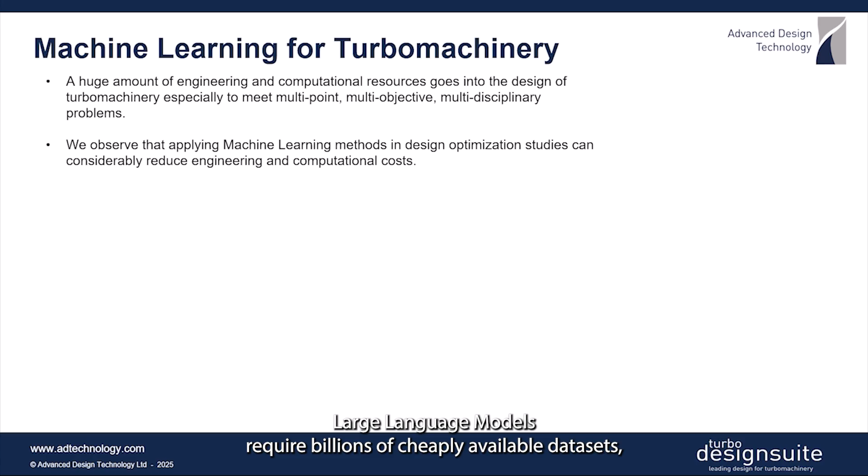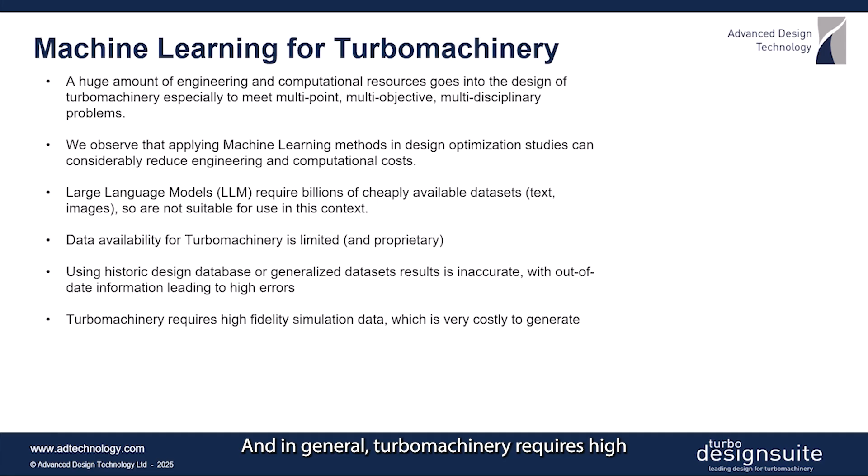Large language models require billions of cheaply available datasets, like text and images, so are not suitable for use in this context. Data availability for turbomachinery is very limited and mainly proprietary. Using legacy datasets is inaccurate, with out-of-date information or poor resolution leading to errors. And, in general, turbomachinery requires high-fidelity simulation data, which is very costly to generate.

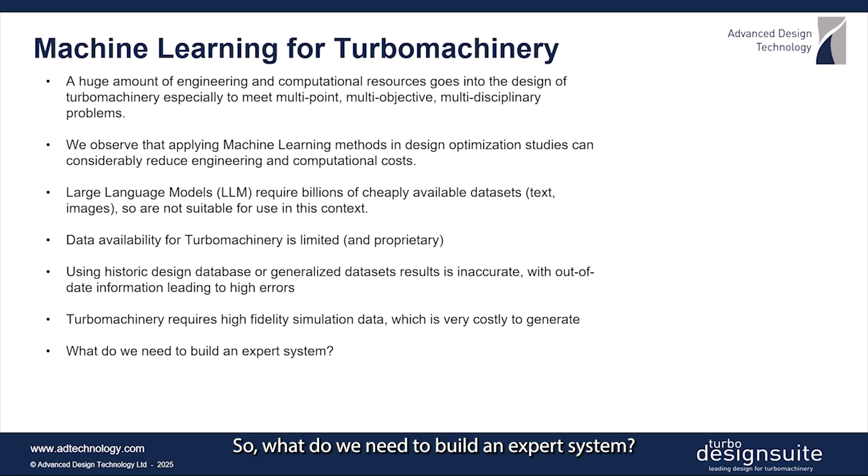So, what do we need to build an expert system? We have identified the following pillar components: geometry parameterization, high-fidelity performance data, machine learning with small datasets leading to expert systems.

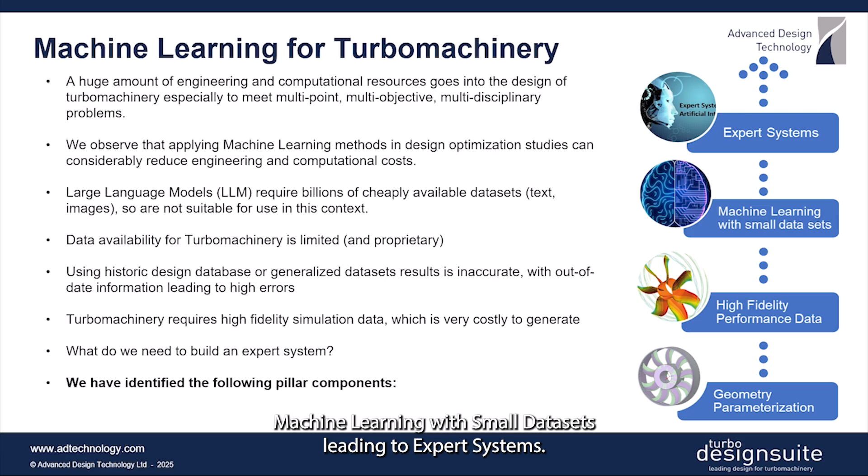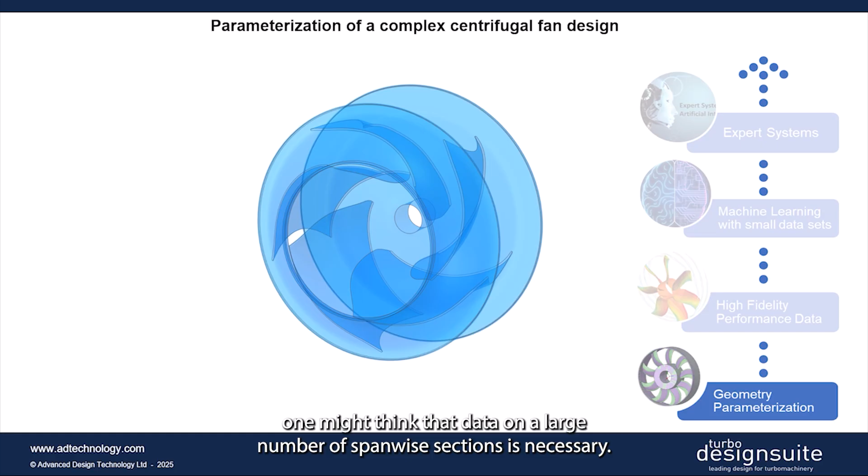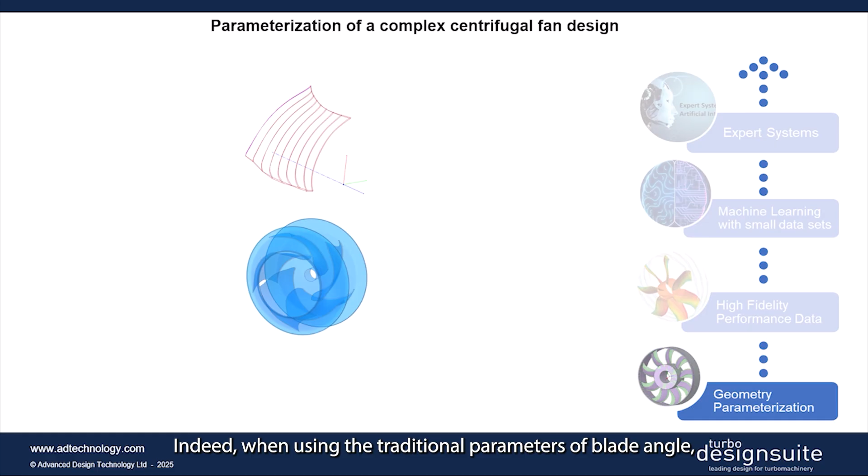Consider describing the complex shape of a centrifugal fan with a set of parameters. As the blade is highly three-dimensional, one might think that data on a large number of spanwise sections is necessary. The more sections used, the more complex the blade can be. Indeed, when using the traditional parameters of blade angle, thickness, and stacking distribution, this is entirely true.

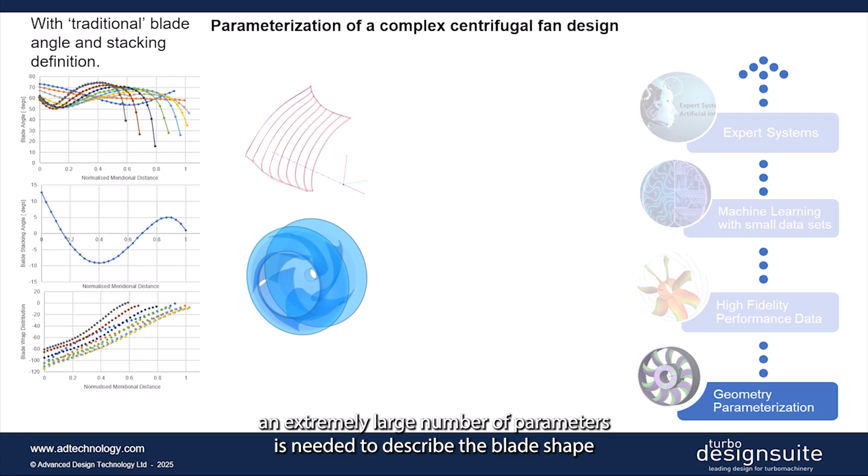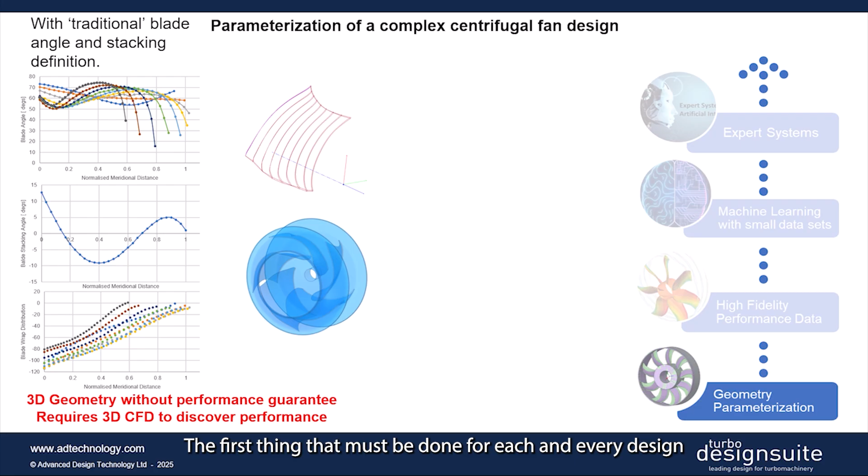What it also means is that, in this traditional approach, an extremely large number of parameters is needed to describe the blade shape and provide enough flexibility in the geometry envelope to drive meaningful performance change. Moreover, once a new shape has been generated, there is no indication of performance for that design, even for the most basic duty requirements. For example, a target head rise for a given flow rate and speed. The first thing that must be done for each and every design is to assess its performance in CFD.

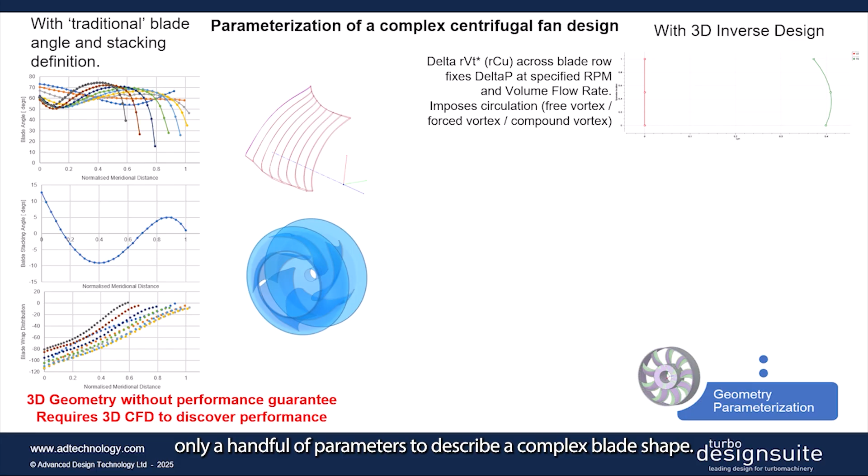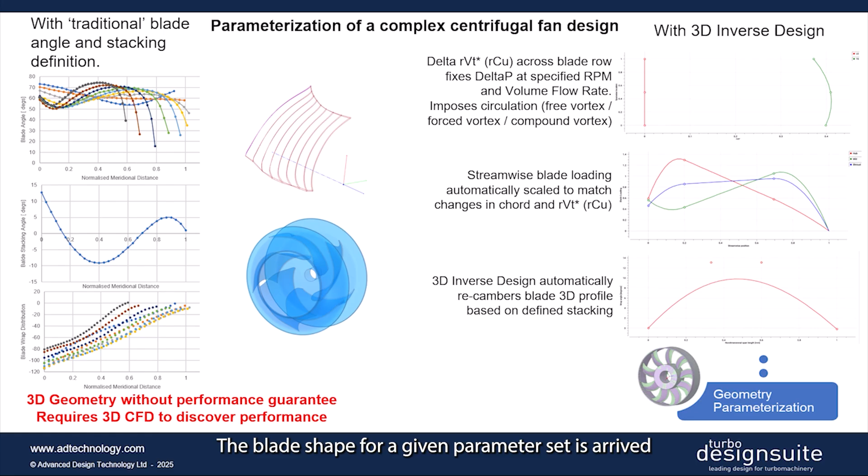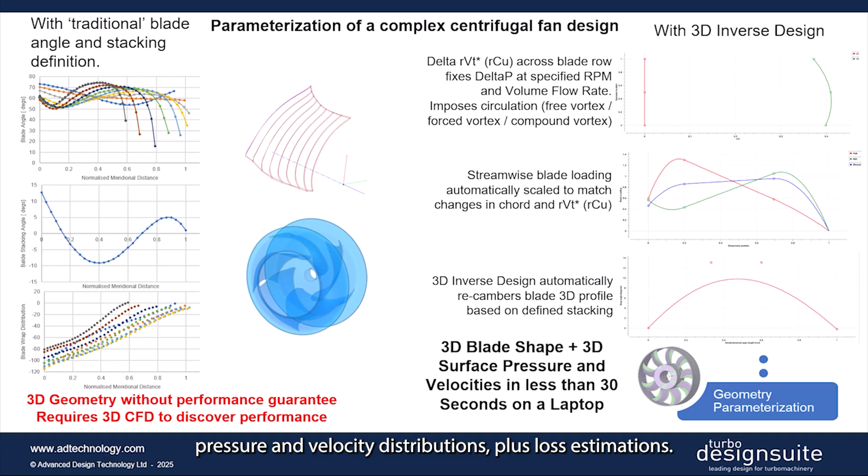By contrast, inverse design requires only a handful of parameters to describe a complex blade shape. The parameters are effectively performance demands, and the blade shape is the output of the given work distribution. The blade shape for a given parameter set is arrived at in a matter of seconds, along with surface pressure and velocity distributions, plus loss estimations. So, when starting to look for optimal designs, the 3D inverse design method is already at a distinct advantage.

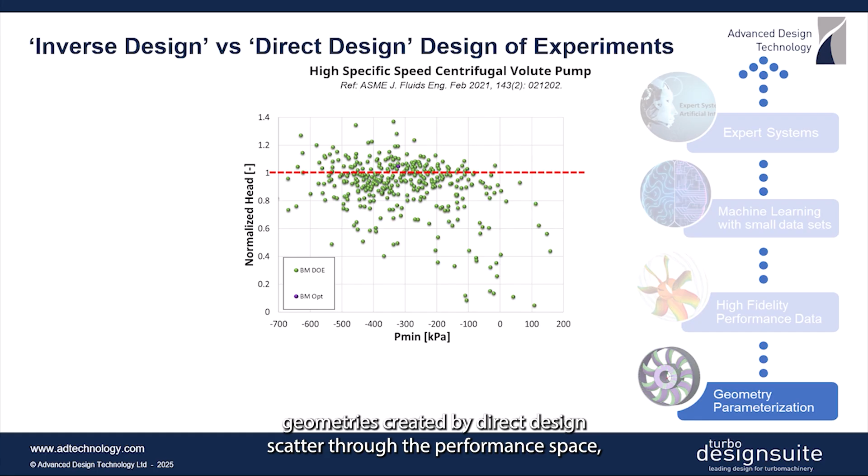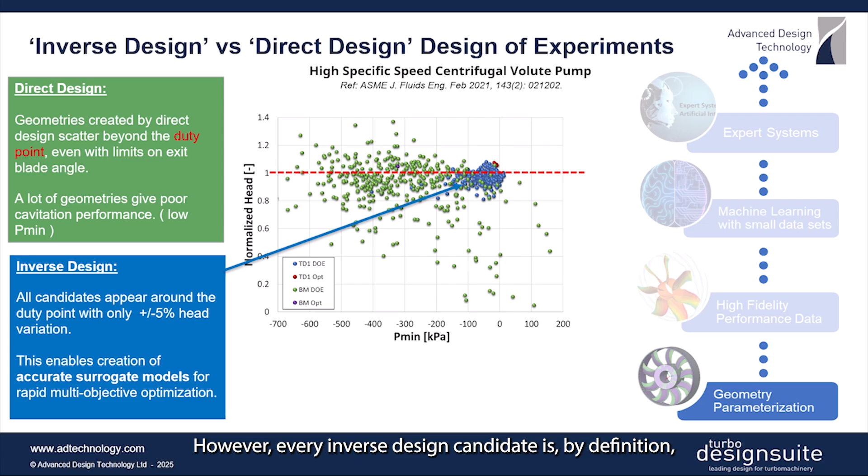In this centrifugal pump study, geometries created by direct design scatter through the performance space, even with limits on exit blade angle. A lot of geometries give poor cavitation performance, as seen in low values of minimum pressure. However, every inverse design candidate is, by definition, going to meet the basic required duty. All candidates appear around the duty point, with only a plus or minus 5% head variation.

The distribution of the work across the blade, which we vary by modifying the input parameters, will affect the efficiency and losses incurred in generating that work. This enables creation of accurate surrogate models for rapid multi-objective optimization.

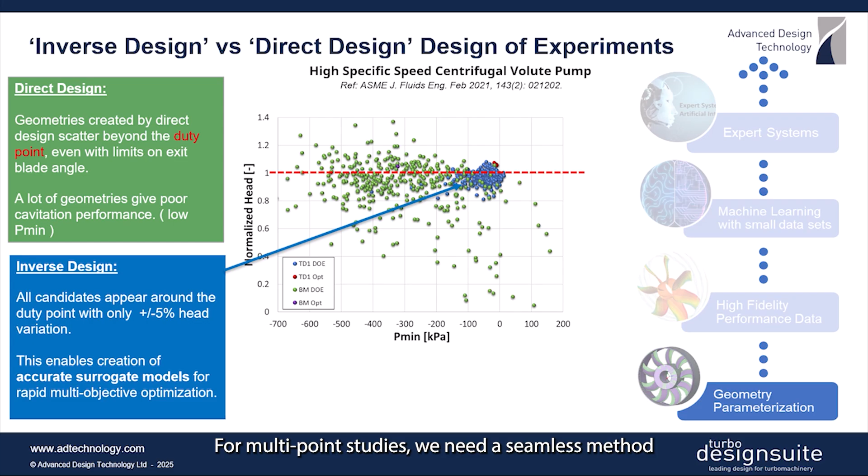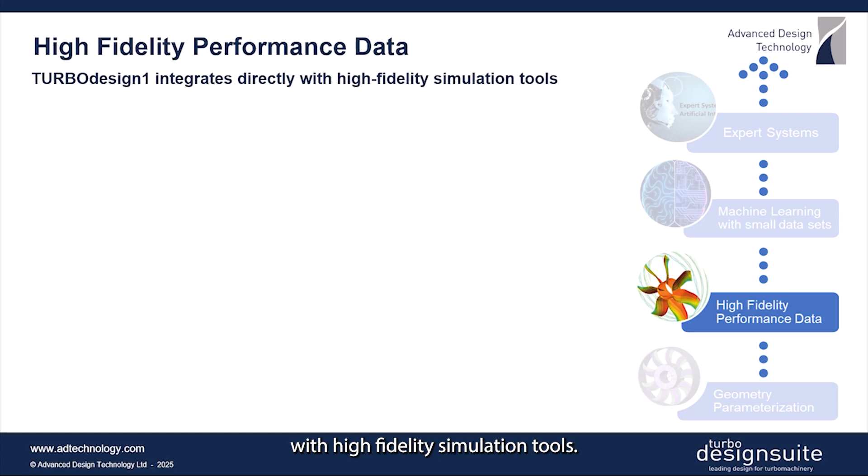For multi-point studies, we need a seamless method for sending and retrieving high-fidelity CFD data to and from the optimizer. TURBOdesign1 integrates directly with high-fidelity simulation tools. It supports all turbo machine types. It is CFD agnostic. Templated methods mean a consistent analysis workflow.

It supports local clusters and HPC. Automated meshing, pre-processing, simulation, and post-processing are activated with just a few mouse clicks. And multi-point results are integrated into the optimization process.

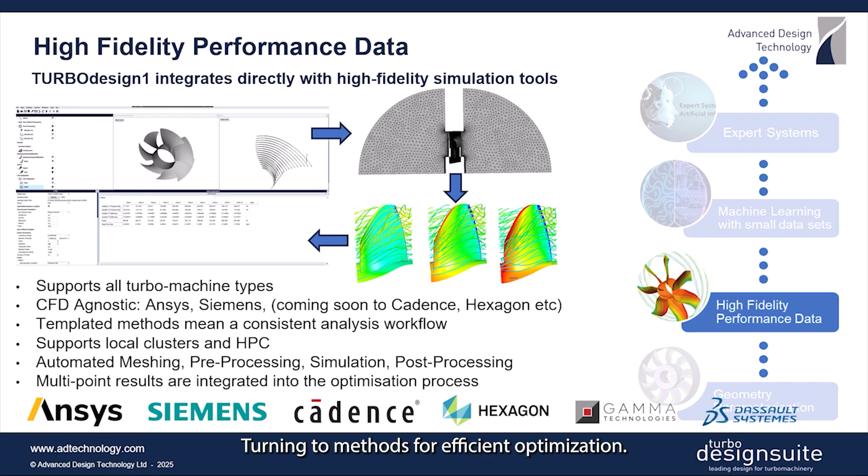Turning to methods for efficient optimization. Multi-objective optimization can be carried out by a multi-objective genetic algorithm. This is a well-proven approach and easy to understand and control by the use of metaparameters such as number of generations, crossover, and mutation probability.

ADT eliminate the wasted effort of a genetic algorithm whilst retaining high-fidelity accuracy with the use of the reactive response surface machine learning algorithm, which can reduce, by orders of magnitude, the CFD cost and time of an optimization study.

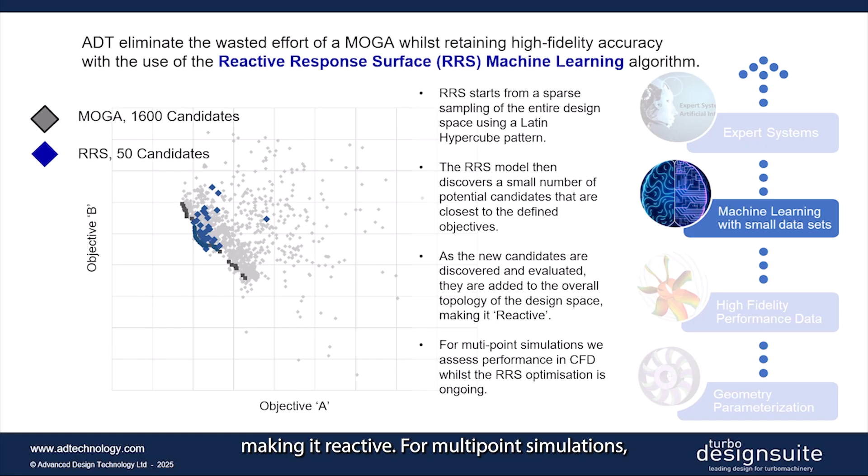RRS begins with a sparse sampling of the design space using a Latin hypercube pattern. The model then discovers potential candidates that are close to the optimal objectives. As the new candidates are evaluated, they are added to the topology of the design space, making it reactive. For multipoint simulations, we assess performance in CFD, whilst the RRS optimization is ongoing.

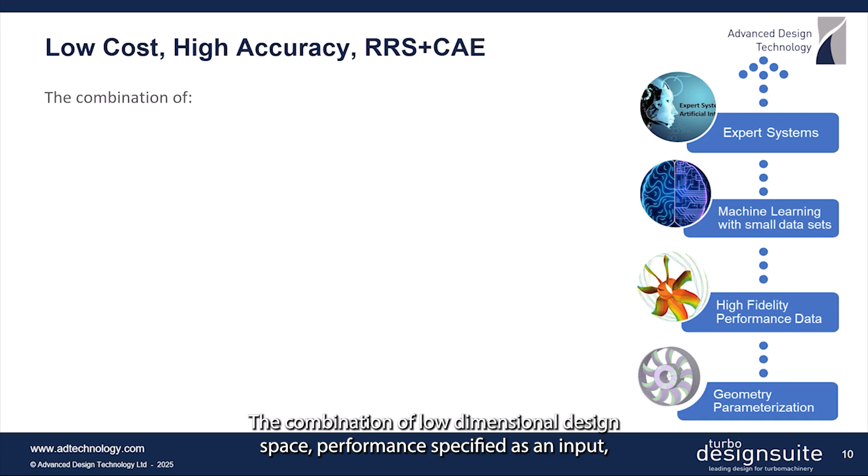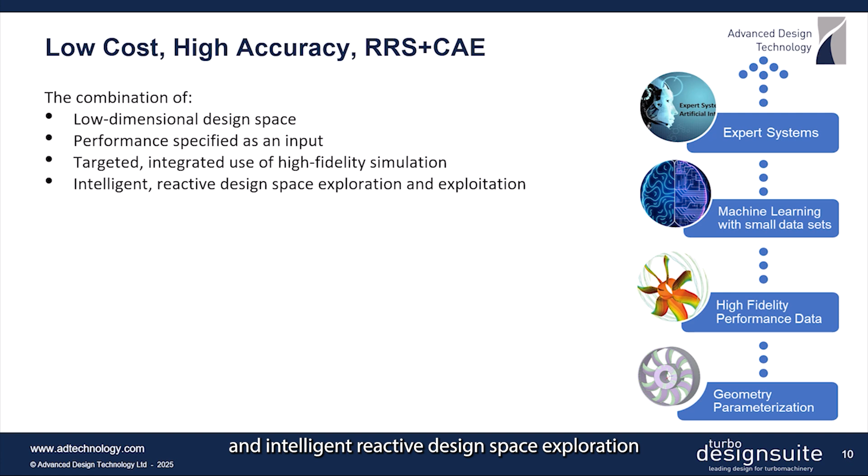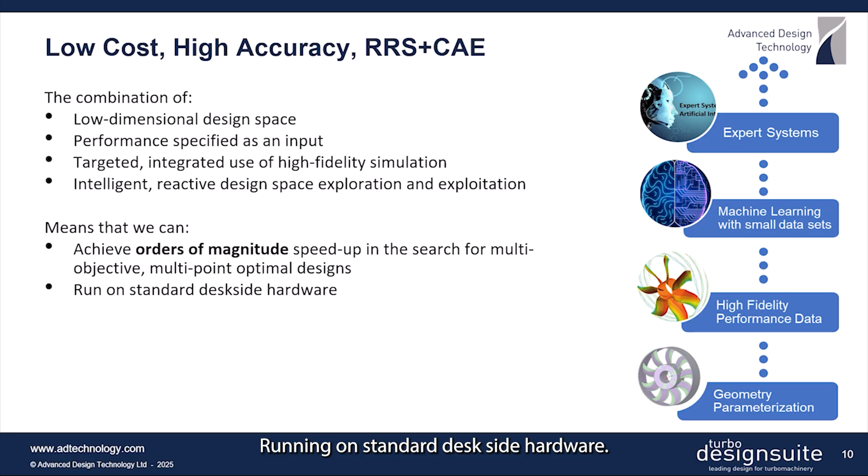The combination of low-dimensional design space, performance specified as an input, targeted integrated use of high-fidelity simulation, and intelligent reactive design space exploration means that we can achieve orders of magnitude speed-up in the search for multi-objective, multi-point optimal designs, running on standard desk-side hardware, whilst exploiting even higher fidelity and multidisciplinary simulation.

This technology is ready to go out of the box, with just a few mouse clicks to set up and run.